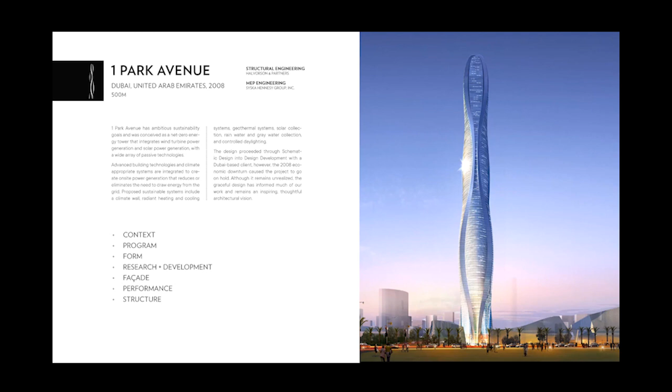I love the form of this building, and we discovered the structural identity for this building from a 15th century study by a mathematician and how to connect the weaving fabric of this together. We started that as a starting point, but because it's in Dubai, we wanted to have a relationship with the Gulf, because this building was initially designed for an island in the Gulf. So the fluidity of water became a driving force for it, as well as the historic aspect of the pearl fishing industry that Dubai started

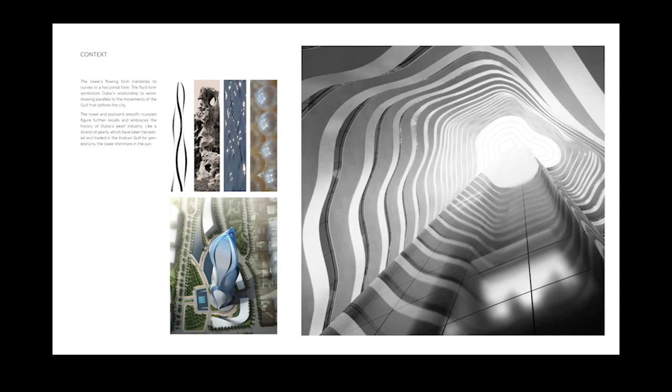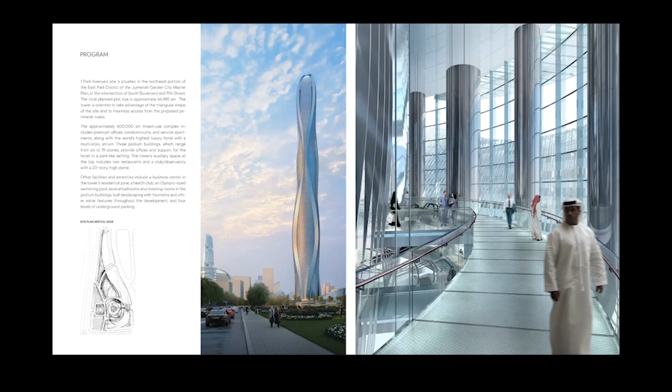out its foundations on. So you can see the building here is a very evocative form, which has the woven structural element as the framework, and then the infill with soft curvilinear elements that started out as trying to identify with the pearl. And what you see here is a now very familiar structural idea of the center core with a triangular relationship and mega columns around that core.

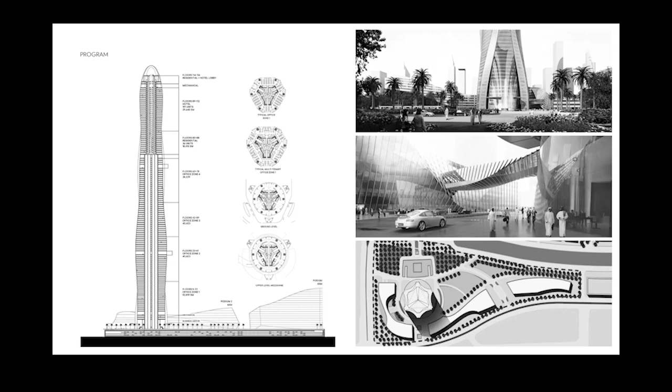What you're seeing here is a design that had round columns on the corners of each of the three legs that this building had. The building design was a series of sloped and curved walls that went up through the tower like ribbons, as these drawings illustrate. The 15th century image I mentioned is shown here on the left of the screen, and then attempts to integrate pearls that look more like eggs here on the next two images.

And then as we move from left to right is the evolution of the early design to get to where we currently are. This project went through schematic design and into design development, all in 2008. And then the crash of 2008 hit, and everything stopped worldwide for a period of time as it related to supertalls and development in general, especially in places like Dubai. So this one was first put on hold and then has never picked up.

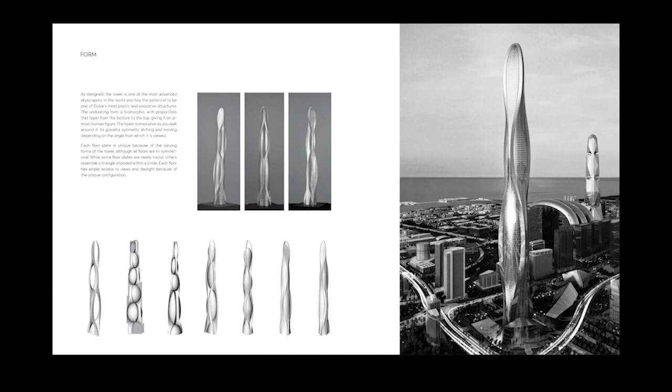But part of the aspect of designing this tower was to integrate sustainable features into it to see what we could do to generate power for the building itself. And height has one significant aspect to it that low buildings don't have, and that is wind, and how wind affects the design of the building, but also how we can use wind speeds as they get nearer and nearer to the top to generate power for the building through turbine integration, as seen in the diagrams.

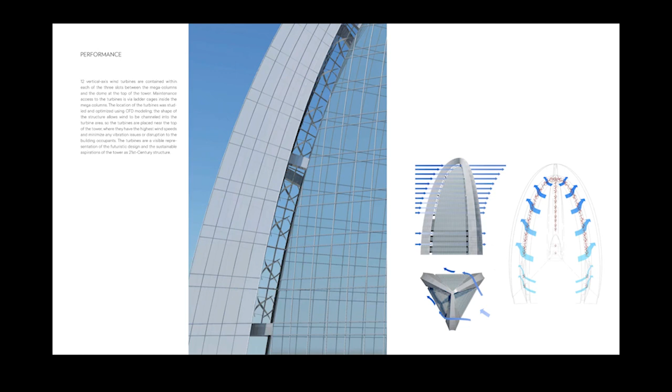Wind also has a strong impact on the forming of the design, as you will find out in future lectures by Bill Baker and others. The design of the building of a supertall is uniquely different than the design of something in the 60-story range or less. And that unique difference is the impact of vortices on the tower and how those vortex actions can create flutter movement within the tower, the kind of movement that you see in chandeliers moving, or the water in your toilets shaking a little bit and rippling.

That's from the acceleration of movement that's created by wind that's trying to get around the building and then trying to get into the void space behind the building. And the action of that is actually a sideways force, a pull and push force that can cause flutter in supertall buildings, not to mention megatall buildings. So much of the wind tunnel activity here is determining not only the overturning moment or the torsional movements of the building, but also the fluttering that's created by the vortex action.

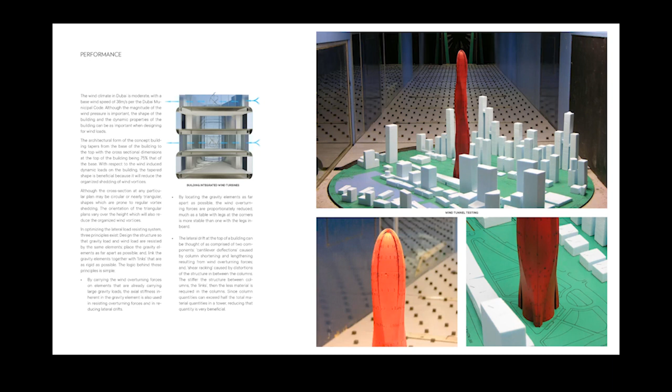So another aspect to the tops of these buildings that we're starting to look at now, really initiated from this building, the Park Avenue Tower, is what can we do at the top of the building that is significant and memorable. And to date, most tops have had a sort of one-story level that's dedicated to the observation deck, and it doesn't go beyond that.

But we've found now that the observation experience can be a strong financial generator for the development and for the developers themselves. Burj Khalifa generates anywhere between 150 and 250 million dollars a year just on their observation deck, whether that's gross or net. So there's a great desire to have people go to the top and look around and experience that height in buildings, but there's also the opportunity to make that a wonderful event experience in and of itself. So we started researching that in this building.

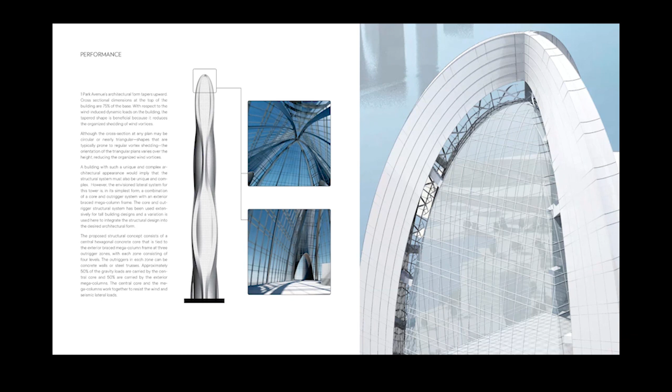This building also talks about the interaction between the facade and the interior space. And in this building, the skin was laced with light shelves and shading devices that reduce the amount of natural light that's coming directly into the occupiable spaces, but in areas where it was facing sun in Dubai, we were using photovoltaic cells to gather energy to help minimize the energy effect in the building.

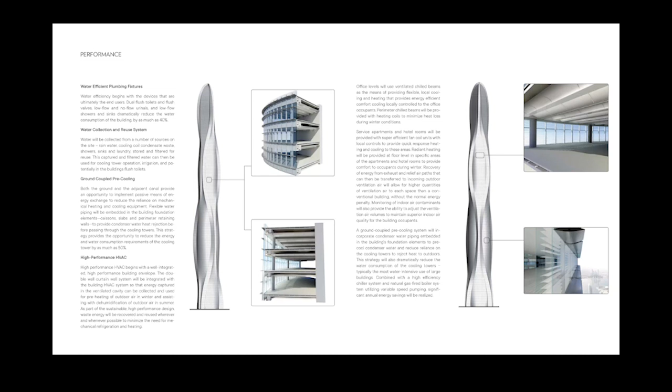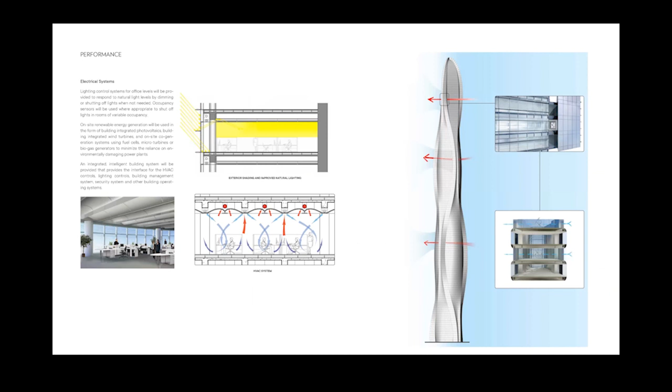We also were doing that from the point of view of the interior tenant space by minimizing the artificial light we would have to use by doing parabolic reflectors in every bay of the building. And that also helped to reduce the amount of energy to the building.

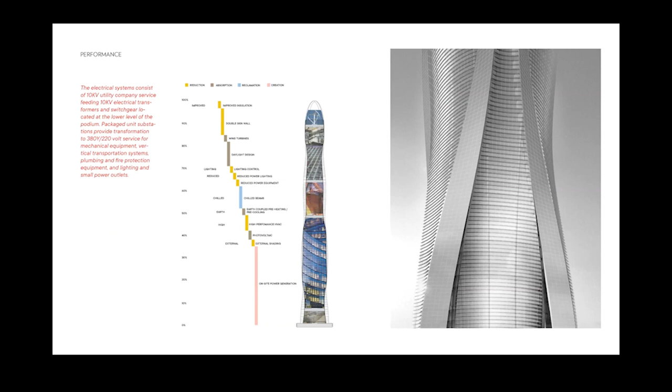This diagram basically goes through a whole series of elements that we look at on every building now in terms of how we can reduce energy in the design of the building itself, in the use of materials, and also the method of generating power in the building, whether it's geothermal, wind, solar, hydraulic, hydronic, etc. So we graph this periodically.

And this is showing the early structural concepts for the building, and the basic form of the building as it steps up. The fact that we go from a larger floor plate to a smaller floor plate is part of the engineering aspect of trying to reduce and mitigate the vortex shedding of the tower, and making floors different along the way helps to do that, and also tapering the tower helps to do that. So many of the towers that you see in Carol's show will be shaped towers that reduce the size of those floor plates as they go up. Not all, but most.

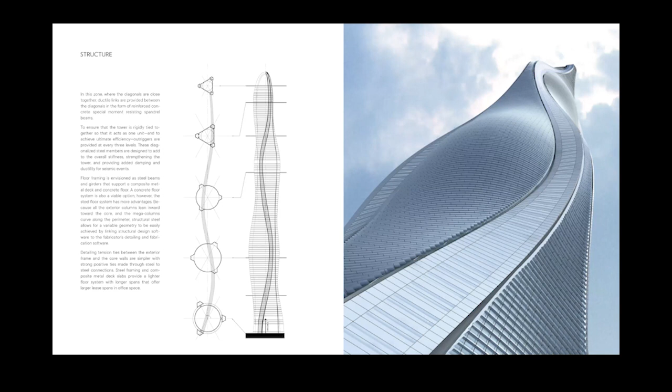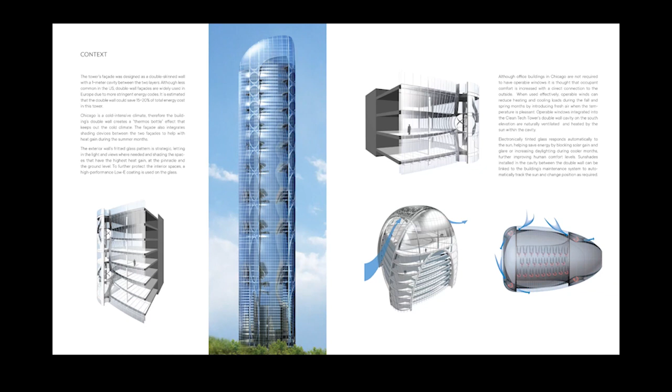And this also shows how at the base of the building, the turbines which are in the pinch points start out with larger sections of facade, and then as it gets near the top, they get closer and closer together, and that's because the wind speeds are higher up above than they are below, and so you need less surface to drive the wind into the pinch points to drive the turbines. So that's how wind is shaping this building. And those are what the oculus look like when the turbine is there.

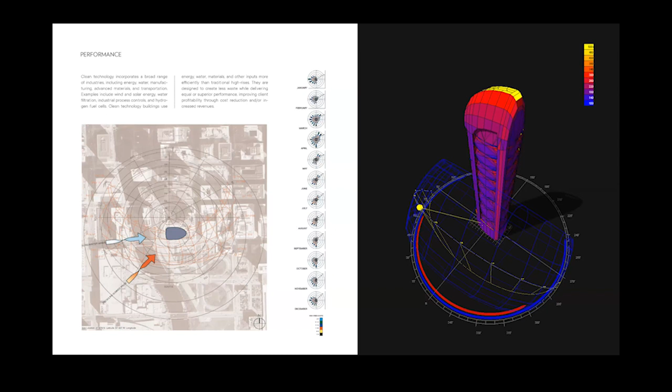And we also look at the impact of sun on the building, not just from collecting sun power through photovoltaics, but in this case, looking at the building as a thermos bottle, and how the sun is impacting the air that's trapped between the outer layer and the inner layer, which we call a double wall now.

But an interesting thing that happens is that the sun is heating up basically the south facade. In the afternoon it's doing the west, and in the morning it's doing the east. But the south facade is when it gets the hottest, and the molecules are heating up in the air cavity. And if we can find a way of just moving that air within the air cavity from the south to the north, we can heat up the air around the north to be roughly the same temperature as the south.

And we've done studies where, in fact, I've experienced it, where on a cool day in Chicago of 30 degrees, you can be on the south side of the building in one of these double cavities if it's 3 to 5 feet deep. And the temperatures on the south side of the building could be 80 to 90 degrees in that cavity. But on the north side, when you walk around it, it's going to be at 30 degrees or maybe 35 degrees.

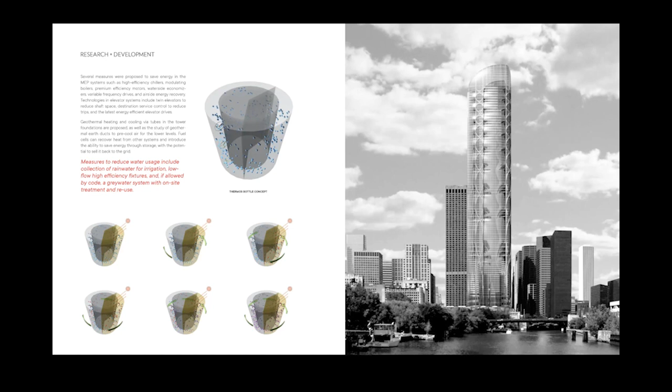And if you can move that 80-degree temperature into the 30-degree temperature, you can create an envelope of 50 degrees for the entire building. So for your air conditioning and heating, in this case the heating, you're only heating from 50 to 70 degrees on the interior surfaces or interior occupied space, which is a big difference between a 20-degree differential and a 50, 60, 70, 80-degree differential that would happen without the double wall.

And in order to do that and to generate interest in those sites, they felt that a super tall tower on that site, in the middle of that site or someplace close to the middle, would create the center of gravity, so to speak, for that site to identify with. So we designed that tower to be the world's tallest building. I was at SOM at the time.

We worked with Bill Baker and many others on that, and we developed Burj Khalifa to be the tallest building in the world, and the steps that it contains were part of all the investigations that we just talked about in terms of vortex shedding. And they were partially informed by the wind tunnel analysis.

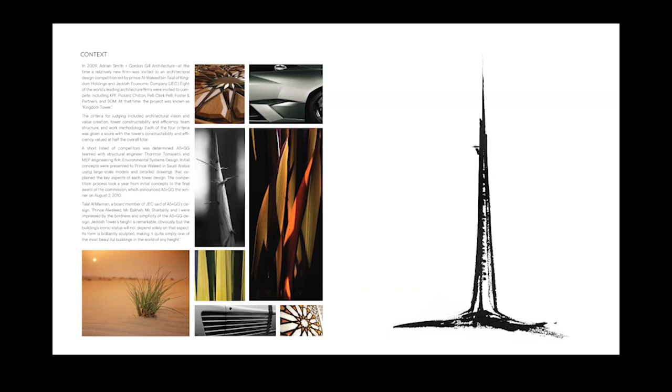And so we looked at desert grasses, we looked at palms and the configuration of palms, and certainly before they even emerge as spreading out, there's a point to the palms, and you see certain pieces of the palm as leaf forms that really started. So we developed the concept and the form based on that idea of new growth and development into a significant whole.

And this shows you basically the completed model of the tower, which has the three sides. And this is an evolution. I always describe this as an evolution from our work on Burj Khalifa, in the sense that it's three legs, it has a center core, it has shear walls that are on 30-foot centers that march out to the point.

But the growth of the idea here, I think, is that in the tapered form that we have here, the tapering is probably the most efficient way for mitigating the vortex actions on buildings, if the taper is significant, and the taper is significant here.

We understand that the taper of this building is slightly more efficient than the stepping of the towers. And it also relieves the contractor from having to transfer any loads that might be caused by a setback of 30 feet or so, so that you're never transferring the energy. You're always bringing the energy down through the structural elements, and that corner is just moving in as it goes up. So it's affecting the end units, not the whole building.

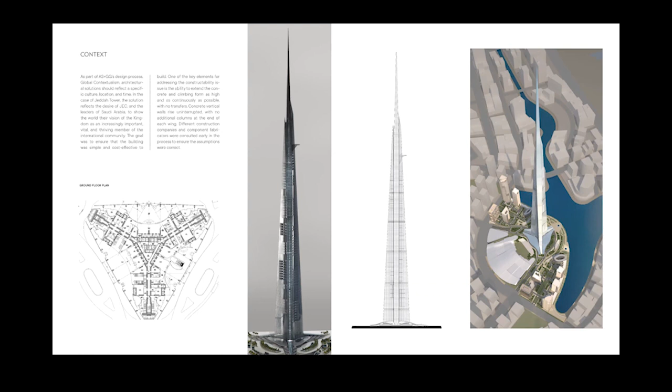And I can tell you from many instances of clients attempting to do a world's tallest building, their first thought is that world's tallest buildings, when they start out, always get publicity. They're in basically every magazine and every newspaper in the world, as Dubai starts the world's tallest building, or Saudi Arabia is doing the new world's tallest building, and it creates a buzz about the building. So that's one reason why the world's tallest building becomes an anchor to these developments now, because they know what it can generate in terms of identity to a district and a place.

Other reasons for doing it: there is ego involved, and some developers will go for a world's tallest building because they want to be known as owning the world's tallest building. But there are also national tendencies for world's tallest buildings to be built, because in the case of a building like Petronas in Kuala Lumpur, when that started, who knew where Kuala Lumpur was? Who knew what Petronas was? Nobody. They researched it. They found out that there's an oil company. They researched where it was, and it became a moniker for the country and a landmark and an icon for that country. So another reason is national identity.

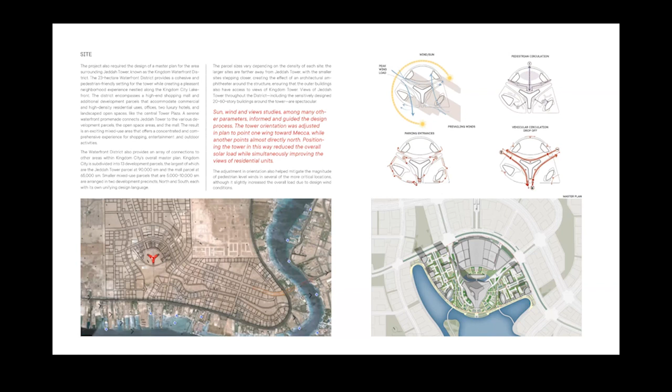And so developers and countries have now learned that they need to control the space around the tower that they're going to build in order to make their money, not on the tower, but on the surrounding context to the tower. It's in these 30, 40, and 50-story buildings where they make their money. That's now a pretty well-known fact, and that's why that is the tenet for every super tall building in China. They always show the tower as part of a larger project where the developer can come in and make his money on the site, but they create an icon for the city itself.

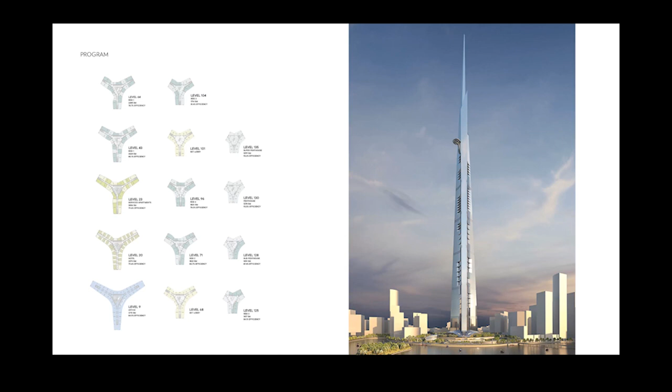Near the mid to top portion of the tower, you see a disc, and that disc was initially designed as a late request of the client. Can we put a helipad on the top of the building? Well, because the top of the building goes to a point, the answer was no, but we can try to put it on the side of the building. So we put a disc that would hold a helicopter pad, and that became part of the design of the tower. We'll get into that a little bit later.

These are just views. The other component of super tall buildings: the taller you go, the more the tower should have a mixture of uses, not just one use. Don't just make it an office building, period. Or don't make it just hotels, but have hotels, residential, office, and special uses, and usually an observation deck as well. You need to diversify the uses, and that also helps to diversify the risk for any developer that's doing a super tall.

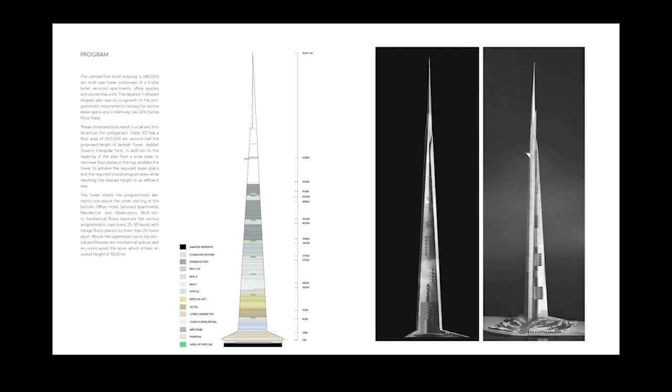At the base of these buildings, they're quite large, but in this particular design, and also in the case of Burj Khalifa, where we used pavilions for the entry, this building we use a shell structure that brings the facade out and increases the size of the lobbies for entry points for hotel, residential, and office. And it also shields the wind that might be moving down the tower from interacting with people entering and leaving the building itself. So it has a number of uses, but one of the uses that we discovered on this particular building late in the game

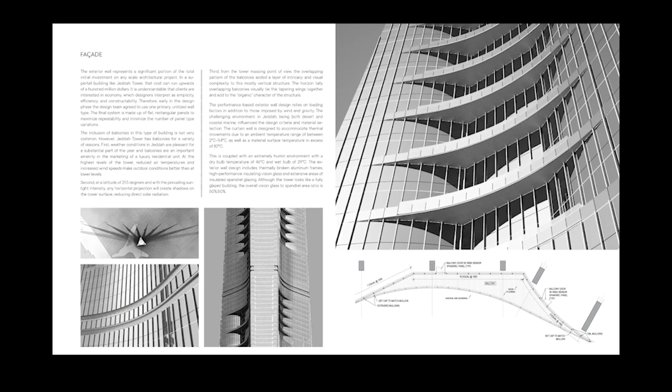was, I want to get to a particular slide here, where the facades being concave in nature, we discovered that the sun orientation on those buildings was beginning to focus on the south canopy of the building itself. And rather than change the design, we thought this is a great opportunity to use the heat from that focused light source. So we put photovoltaics, we put solar collectors on the roof of that piece, so that we can generate power from that to run the hot water systems for the hotels and other aspects of transferring heat into power for the building itself.

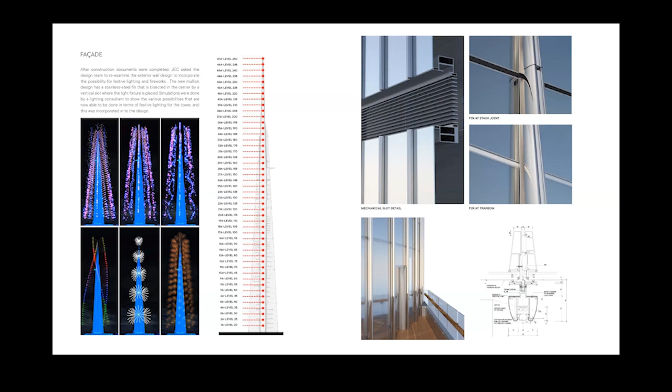The facade, we originally designed as a smooth, slick skin, but as you know, roughly around 2010, when Burj Khalifa opened up and we saw the pyrotechnics happening there, and that was just a one-time event. But what happened after that for the next 2 or 3 years was sound and light shows that became nightly and hourly, and featured very much in terms of the iconic aspect of the building. And we had studied earlier the idea of doing that at the spire only to actually potentially do shows and advertisements electronically from the top, but that went away, and then it has reemerged.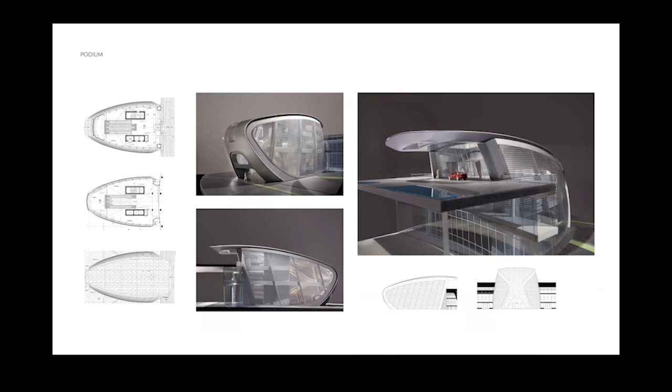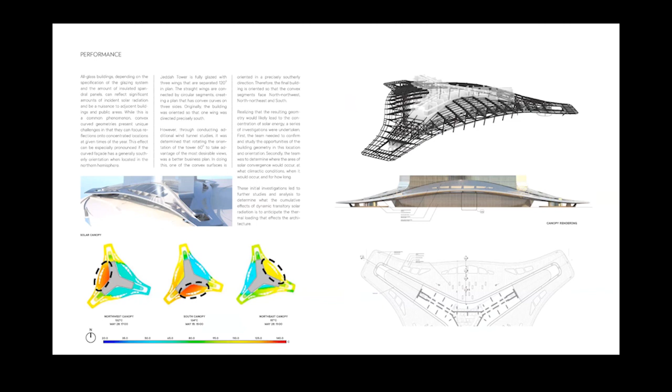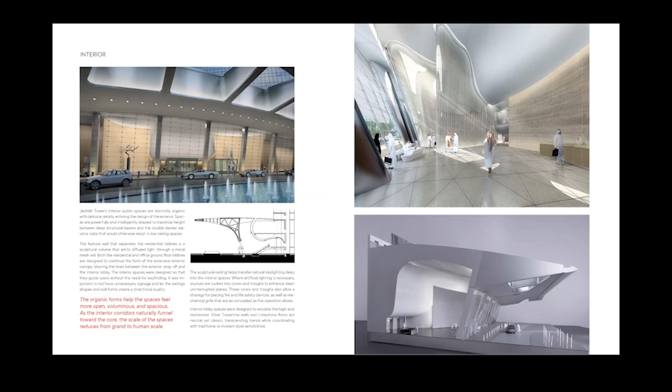We also have small little buildings around the tower itself that are entry points to the ballrooms for the tower. And these are diagrams that are in our book that we are going to publish in a couple weeks, just to give an example of some of the content in this book. The lobbies are very evocative, both forms within the lobbies themselves and multi-purpose, because in several of these, the lobbies are on the second level, or there are 2 levels to the lobby for the double-deck elevator systems that we employ for this building.

And at the typical floors in the residential and in the hotel, we try to capture the character of the site and the surrounding context. In this case, the Red Sea is directly adjacent to the building, and of course everything in Saudi Arabia starts out as desert, basically. So the forms of the sand building up is ever present in the character of Saudi Arabia's geology.

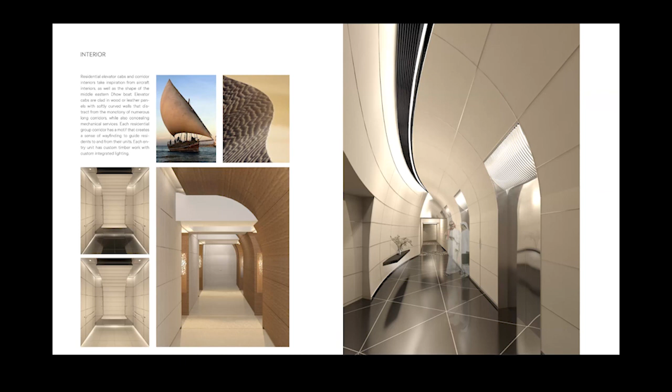And then I already told you the story about this as a helicopter landing pad, and the client loved it, but when we started talking to helicopter pilots, they said, no way we can fly a helicopter on that. It's too close to the building and it's too susceptible for risk. And so because our client loved it, he wanted to keep it, we said we can make this into the observation deck. So that's what it became.

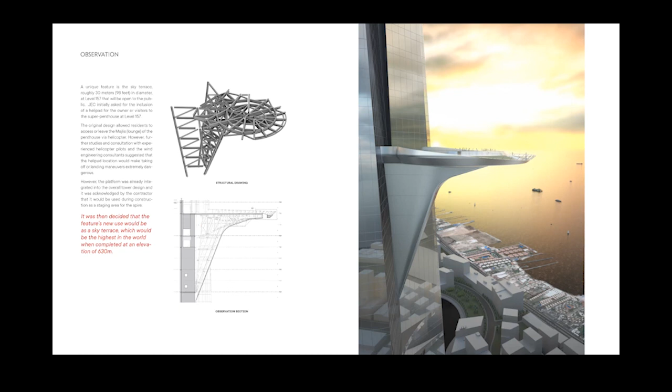And then as we were designing it and talking to contractors about building the building, they said they really liked the idea of this platform up at 600 meters that they could utilize for staging the construction of the spire itself. So that became an additional advantage to this piece sticking out of the building itself. And it actually helped the possibility of getting the building built up to its 1 kilometer plus height. Another image of it.

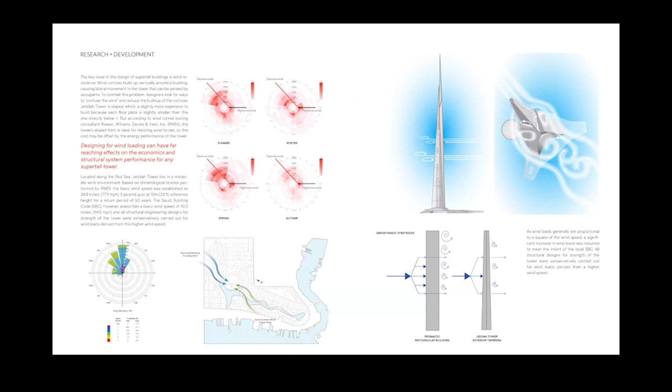These are studies from our wind tunnel test analysis that show how vortex action is on the building at any one point. We did the wind tunnel tests in a number of ways. And this just shows the effect of smoke moving through on these tests. But these tests are invaluable, and they should be done

at the first idea. Once the first idea is developed, we should be doing wind tunnel tests at the very beginning stages to verify that, at least from a wind perspective, there are no inherent problems in the design. You have to remember that these super tall buildings, many of them start in the design process, but very few of them finish. It's so difficult to get through the entire process and so expensive to do these super tall buildings that many of them fall by the wayside and don't go beyond the initial phases.

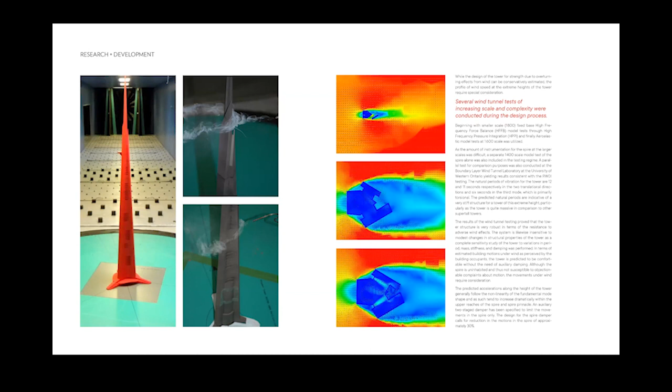This one is also hampered by economic issues and other issues, but here this building started in 2013 with the foundation systems being built complete. It took over a year to do the foundations for this building. They go down some 300 feet or more in some areas, and a very expensive process.

So last I heard, which was about a year and a half ago, I think it was in November when I was in Saudi Arabia, the discussion was going to be that they were going to start construction in the first quarter of 2020. And you know what happened in 2020? The pandemic. The pandemic started, and the tower never got past that point.

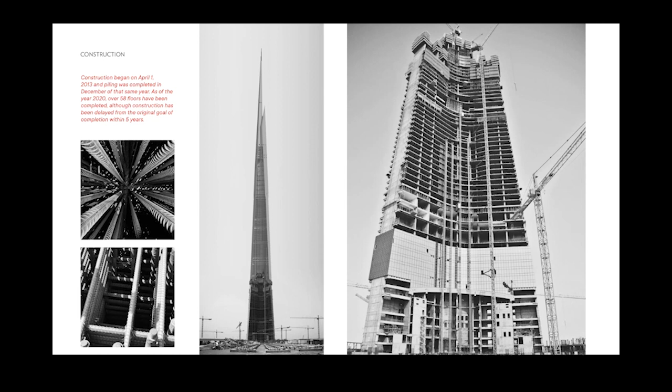And as part of icons, I put this into the show here because Central Park Tower is our first completed super tall building at Adrian Smith plus Gordon Gill. The structural engineer was WSP, the mechanical engineer was AKF Group, and this building is now 1,550 feet tall, which is 472 meters tall. We had originally designed it for a spire.

I wanted the spire to be there, and I wanted it to be taller than the Freedom Tower, but it got nixed because our client Extell said, we don't want to ruffle feathers, so we think it's best if we just keep it at the 1,550. So the spire dropped out of contention for that particular building and reason. But the building itself is a focal point looking up Broadway, which is that view.

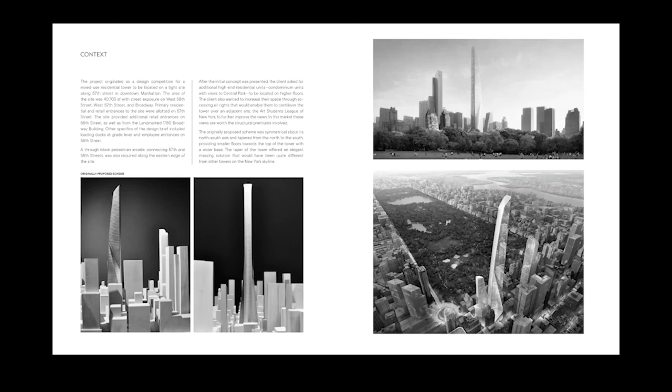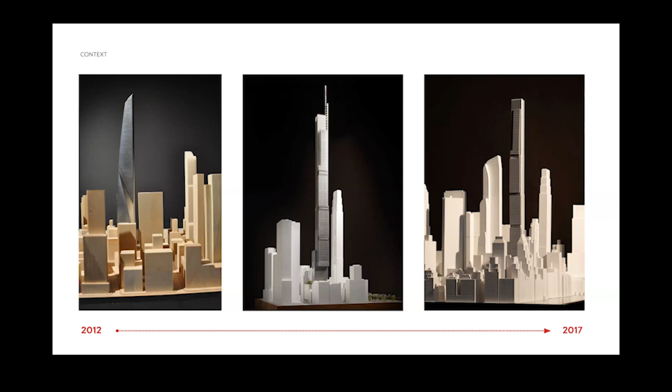But events occurred after this design, such as the Bob Stern building in the foreground between the tower and Central Park, that made us reanalyze the architecture and the placement of the tower itself. And part of the placement has to do with the location of the Stern Tower to its north. And part of the solution for capturing as much as we can of the Central Park views was to cantilever a portion of the tower over the Art Students League building, the 5-story building that's adjacent to it on the east side.

And here you see the image of the cantilevered elements of the tower. It cantilevers out 30 feet to create 30 feet more of vista to Central Park, not blocked by the Stern building to the north.

Another factor to this building, it was designed with a lot of integration of wind studies for the tower. It's a very thin tower, and we were concerned about the vortex action on the tower because it's mostly residential. And we fine-tuned the building through numerous wind tunnel tests to size the notches of the corners of the building to where the wind effect was the greatest and where the wind conditions could be modified to mitigate the vortex actions of the building. So this building was fine-tuned in that regard.

And it creates a silhouette on the skyline that's much like the stepped silhouette of many of the Manhattan buildings of an early era. But there's another unique aspect to this building, which is that most of the units within this building have that Central Park view, and they have another view which is very impressive, which is the view to the south to the Empire State Building and beyond.

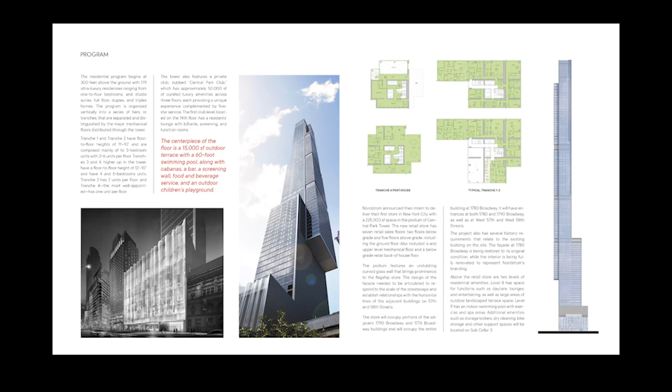We also wanted to identify the central core of the occupied space with a facade that was vertical and that would shimmer in the sunlight and catch the horizontal lights from the early morning and the late afternoon suns. And so we came up with a polished element that sticks out beyond the glass face. And at one time it was sticking out quite sizably.

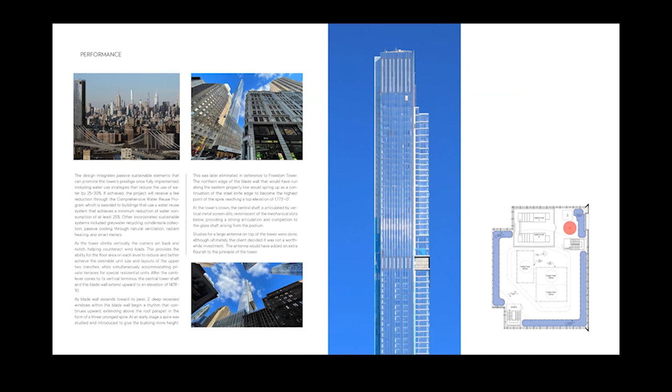And one of the research elements that impacted the building design here was innovative and new. It was looking at the facade itself for winter conditions, not just summer conditions, but winter conditions, and what would happen in driving snow. And we went through a whole series of shapes and iterations of the configuration of the tube or the piece that projects out.

And we did tests of it, not only wind tests of the detail, but also tests of how snow would drive and pile onto the fins and get gathered on the fins, and what size was appropriate for this without having the snow pile, freeze, and then be heated up later from the building and fall in large chunks. We didn't want that, and the client certainly didn't want that.

So the study was how to achieve a texture to the facade that would give brilliance to the facade with low sunlight, and still not create problems of snow buildup and potential hazard from falling. And so the study was done. That was an extensive study that was done for the facade to assure ourselves that the buildup of snow would be minimal, and not come down in big chunks that could harm people or buildings.

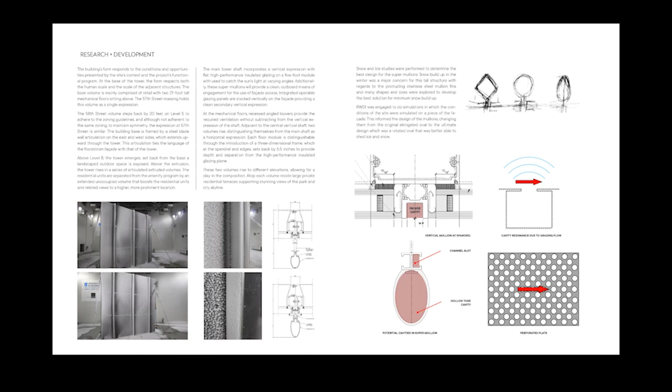And in the design of this building, from the beginning, we knew that we would have to have a tuned mass damper at the top of the building. So we accommodated that in the very top of the tower, and now the top of the tower being lit up will become the sort of beacon for this tower at night.

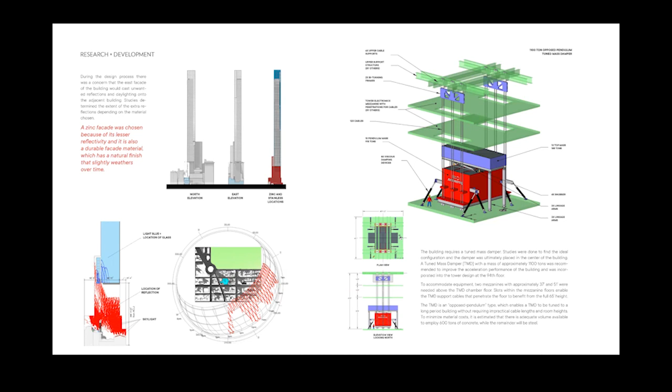So what was next? We came up with an idea of integrating natural ecologies into the tower itself. This has been done with Ken Yeang earlier in the period of architecture, where he would integrate gardens into his towers, and they were in the 30, 40, maybe 50-story range, but nothing taller.

Here we came up with an idea for a competition in Suzhou, which is called our Biophilic Tower, and we didn't win the competition. I think Gensler won the competition ultimately on the site, but the jury liked the idea. They were just not thinking that they could do it at this stage. And the Biophilic Tower basically is the introduction of elements that would comfort the occupier.

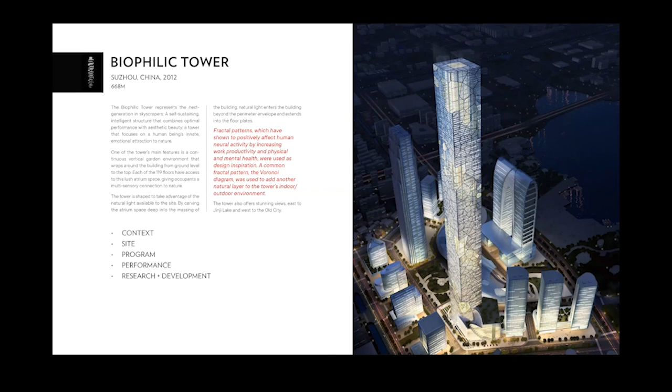And one of those elements was the fractal pattern. Research says that fractal patterns of nature are calming to the human, and they're comforting to the physical and mental health of occupants. And so we laced this exterior with several different scales of fractal pattern to form an image for the Biophilic Tower. And you can see the fractal patterns on the left screen there by nature.

Some are leaf forms, some are dried water beds; cracking mud surfaces create fractal patterns, believe it or not. And so you see our model here on the right, and what's on the left lower is the inside of the model showing the fractal patterns. And if this were a green image, it would be covered in greenery.

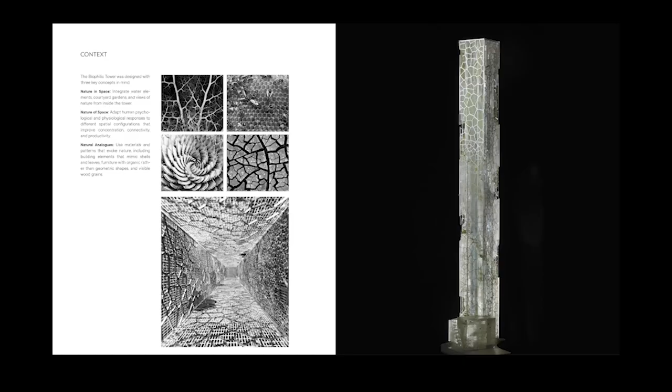But the other thing we did here was we felt that every person, every floor should have access to an outside terrace that would have growth and planting in it. And so we wrapped the building with cuts on every floor that created a spiraling effect to the tower. And sometimes we clad it with the outside edge. Sometimes we open it up to the inner smaller level fractal pattern, and sometimes we open it up all the way to give a variance for the tower and to be less systematic.

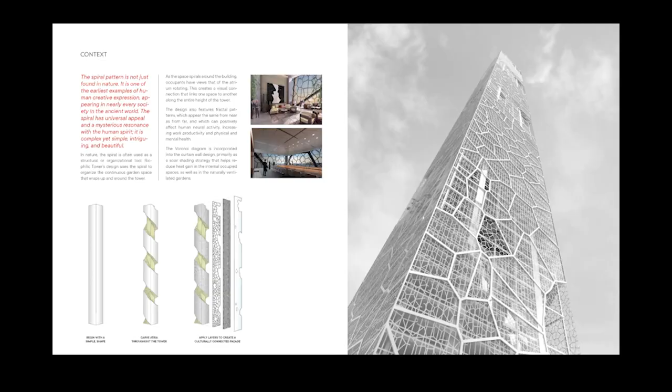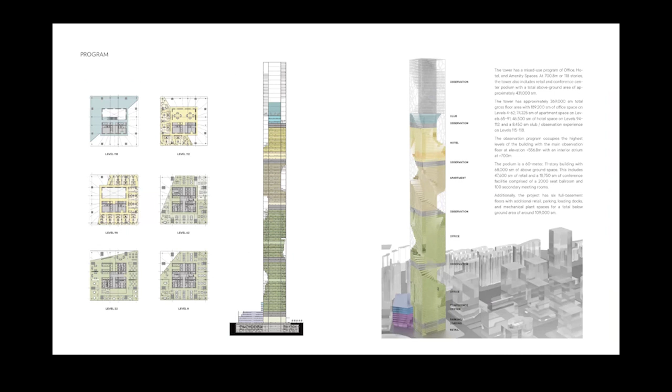And there you see the impact of it from a couple of floors where you can see the fractal pattern through the typical floors. And there you can see more of the nature of the pulling away of certain elements of the facade to expose and create natural air movement through that spiraling element of the tower that gives terraces to the unit itself. And there is the image of the terraces themselves, which are gently splaying up through the tower.

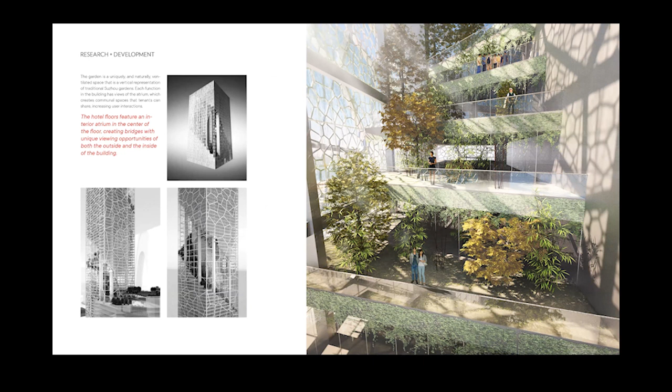Now I'd like to talk about Megatall. And for me, Megatall is not just another layer of height, but it has to do with the connectivity of towers and the ability of towers to have wind movement moving through the tower itself.

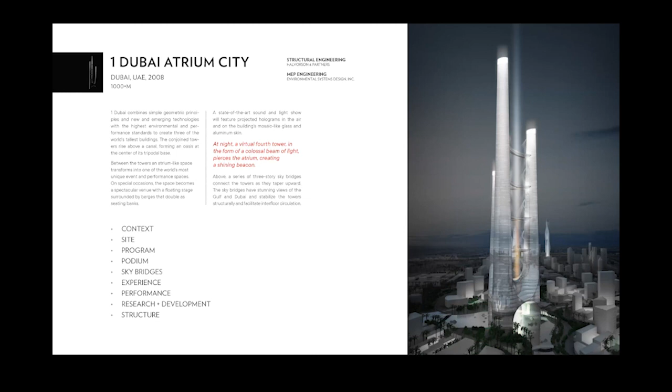And we weren't thinking of Megatall as a distinctive character when we designed this building, but it became the idea of Megatall once we explored the idea of 3 towers being interconnected at the base and bridged together or stitched together at different points of the building to strengthen the building to act as one. And so I wanted to show this tower to illustrate what I think could be the next big move in terms of creating taller and taller buildings.

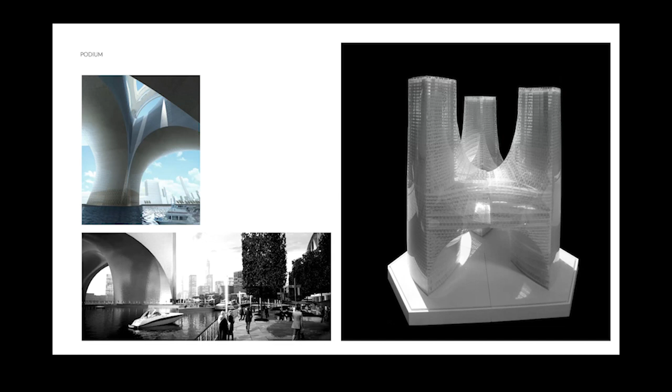This tower itself was tied with a base as well, and it was spanning over what was, at the time we designed it, a T-shaped canal system in Dubai, and the water would flow underneath, adjacent to these 3 towers, but underneath the central point of the tower. And we thought this would be a great place to have events occur in the water, with seating that could float out in the river or be docked at the sides of the river and then be moved into close off the 3 arches of the building that you see forming the base, so that at night there could be events down there. And I'll show you a little more of that later.

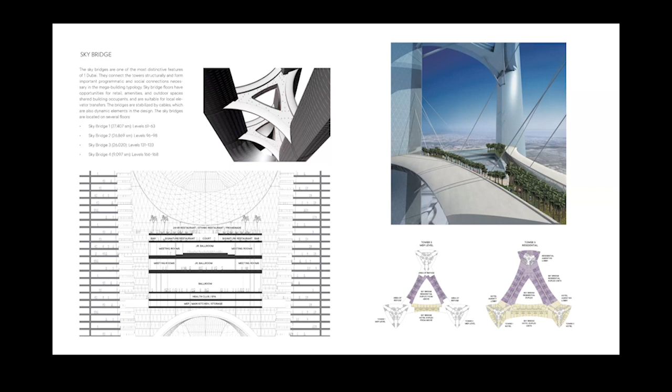The bridge design itself was challenging. We initially thought this could be a cable suspended structure and be cable braced from the bottom. Through our investigation and through the investigation of our engineers, Halvorson in this case, it turned out that the strut system from the bottom was going to be more effective than cables, but the cables can still work at the top to assist in the gravity loads of the tower. And the engineering discussion was well advanced when this tower also stopped in 2008.

These are a couple of images of the tower looking down through the 3 towers and the opening that's in the center of the bridge element. And there would be a 4th tower that emerges from this, which was a tower of light that could come up through the openings in these towers and create a special event.

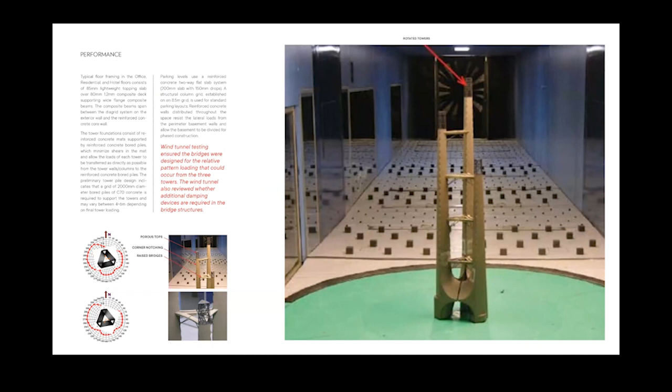And of course, the wind tunnel tests were done on this, and we were warned by the wind tunnel consultant, RWDI in this case, that each of these 3 tower components would need to have their tops opened up so that wind could move through them. So this was the first step to redesign the top of the building, and we looked at notches on the sides of the building that you could see on this drawing.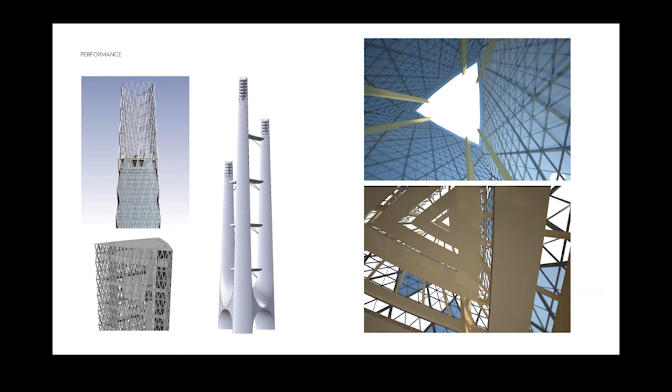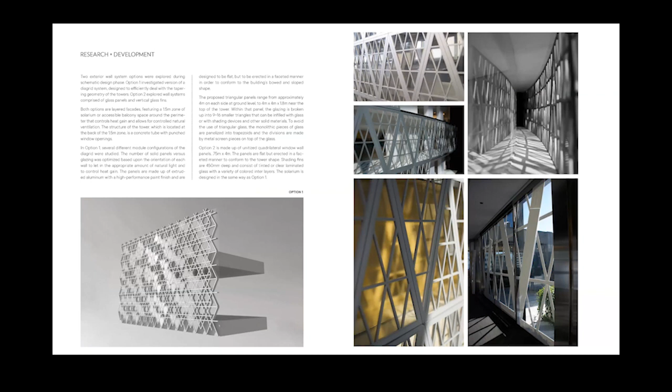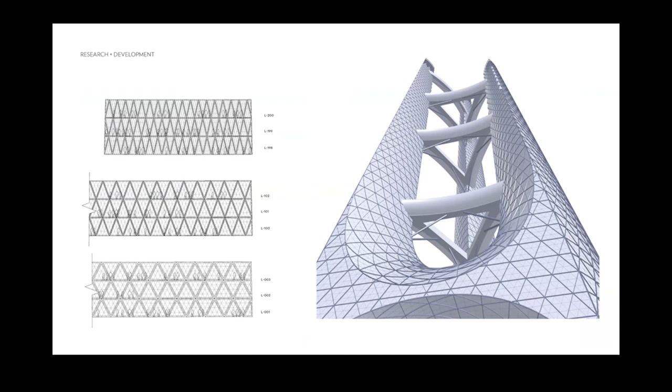We looked at various configurations and geometries that the facade might take to sort of diffuse the surfaces of the building as it got up towards the top, and how it would affect the body of the building. And this building was always conceived as a double wall building form. So you can see the double walls in there. And sometimes this skin we thought could be open or partially open and closed in other parts. And so you see the texture could change depending on where it is in the building itself. And those spaces could be utilized as balconies or solariums if they were closed off in the tower.

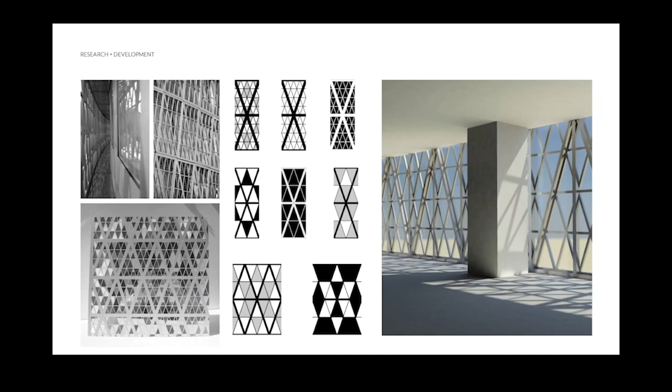We also concurrently looked at many different versions of the design and the skin. And we also looked at a simpler move of fins, glass fins that could be colored. From the inside, you wouldn't really notice them because you're looking straight out through them, but from the outside, they could create very interesting colors in the facade as they layer one against the other.

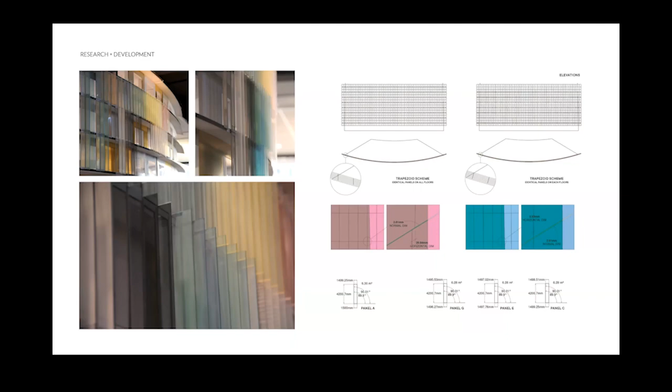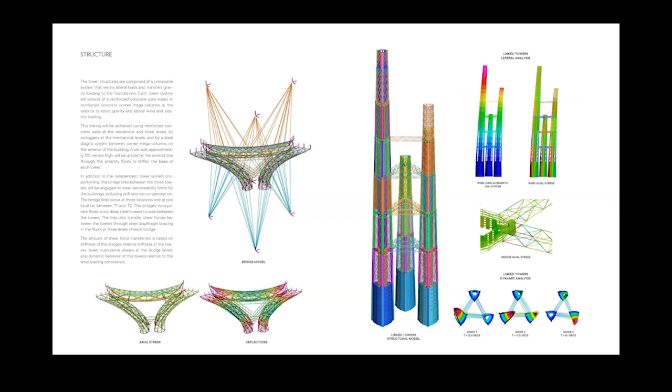And then these are just some structural diagrams that I wasn't going to focus on, because I know that engineers are going to be in the second stage of the Skyscraper Museum program, so I won't go through much of this.

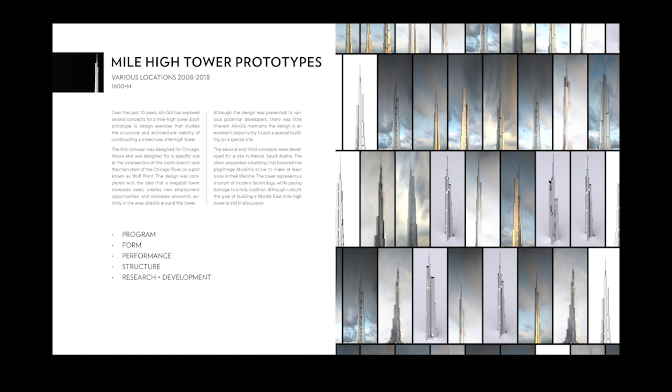And then shortly after the crash of 2008, we thought, let's do some research on Mile High. We had some additional people around. We didn't know when those projects were going to start back up. So we started looking at Mile High and whether we could actually build a Mile High. We started talking to Samsung about Mile High structural systems, and we came up with some step systems. And in the photograph there, you see a 1 kilometer tower and a Mile High tower next to it.

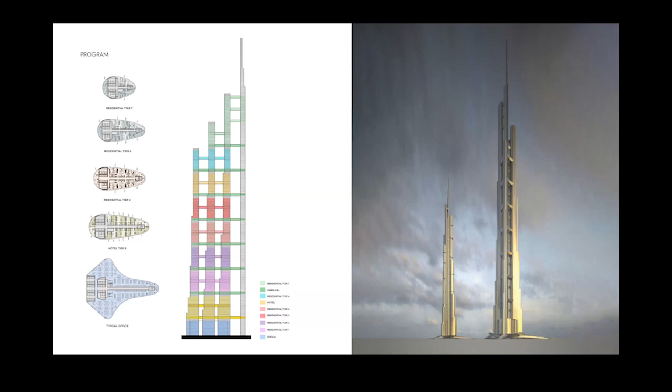Again, this was based on a much stronger connection between the 3 leaves of the tower, both from the point of view of those bridges that you see in the diagram and from the surrounding floors, would be embraced with a grillage, a circular grillage that would help to tie the 3 leaves together as a single form, but yet let air movement through them so that you're not blocking the air from moving through the tower.

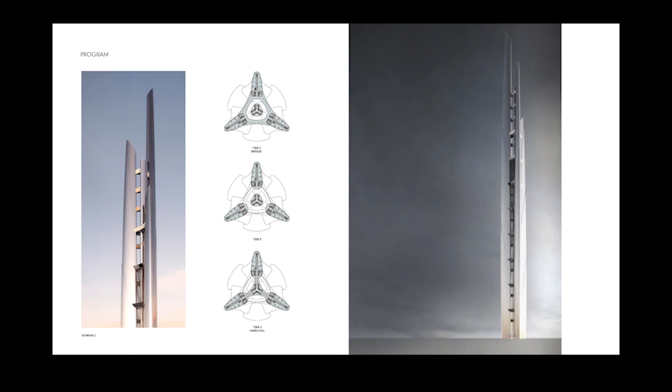And the center point would be the elevator systems that would be shuttle systems to sky lobbies that would then feed local zones for the 3 components of the tower. And then in another version of that, which we studied for a client who thought maybe this could go into Mecca, we did a slick version of what you just saw in terms of a Mile High as an idea to whet the appetites of people. So far, it hasn't gone anywhere, but it could still be out there somehow.

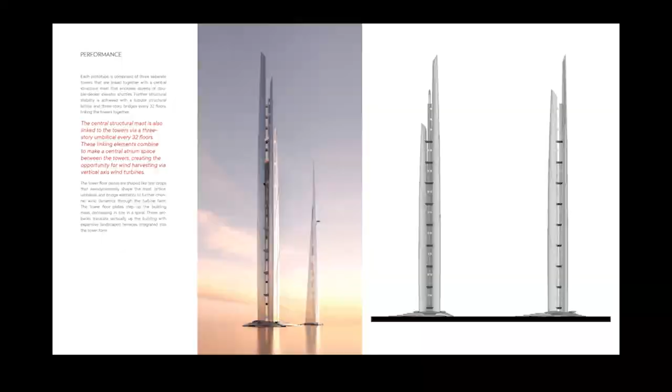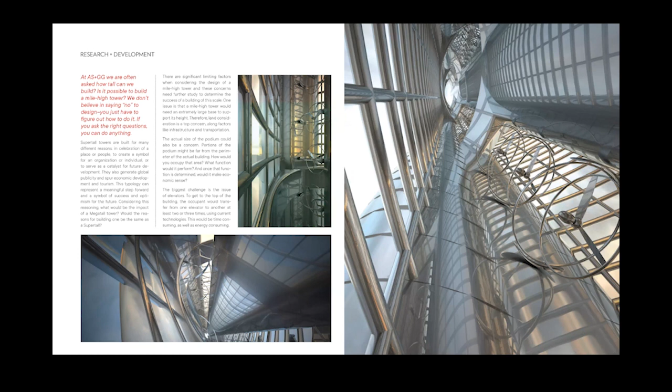And inside that cavity, come back to wind turbines and the power of wind generation that could happen at a building like this. And it could be a very interesting space to view up and down in from the platforms as well. So that's where we are there. But I wanted to talk a little bit about something that popped up after those studies, which was developed by ESD, our mechanical engineer on the Jeddah Tower.

And we started talking about at what point in height does it become uncomfortable for people to be? And they said they had just done a study about height versus oxygen content. They also looked at height versus temperature. Of course, every 100 meters or so, you reduce your temperature by a centigrade or so. That gets into how you utilize cool temperatures to help air condition your space by drawing from the top floors and bringing that air down.

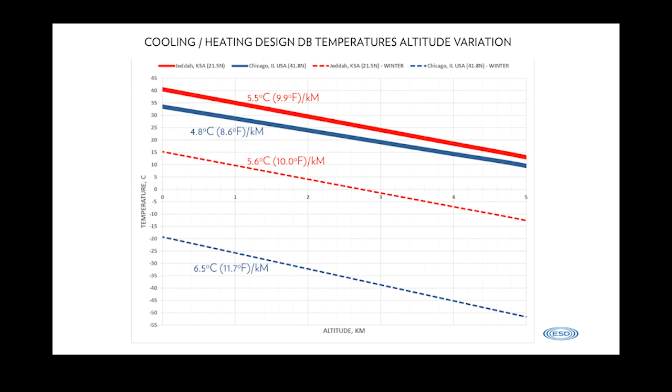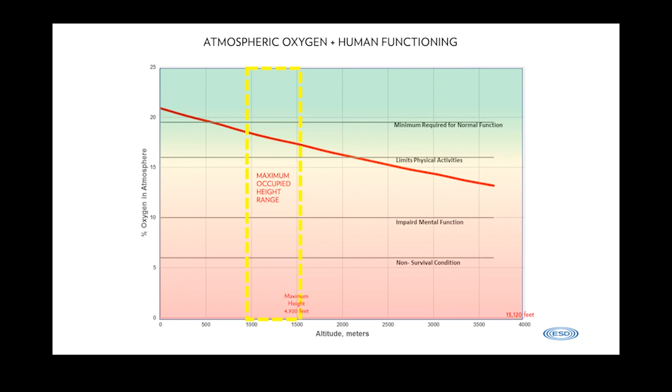Thank you so much for such an incredibly rich array of information. You really took us through every scale of the building. It's clear that you've got a 500-page book coming out in a week or so, because we tried to get kind of every aspect of that into the many dimensions of these super and megatalls.